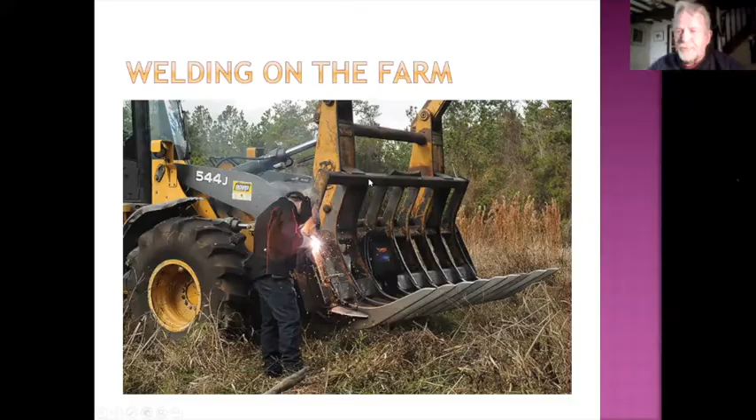In terms of welding on the farm, this is probably a typical scenario. And whilst there is a lot of information there, we'll come back to that image later on in the program. You may be aware that a lot of the fumes associated with welding are covered by certain operating criteria, exposure limits and time-weighted averages. But steel, and we're talking about carbon steel predominantly, hasn't fallen into that category.

However, after serious research done by OSHA and the Health and Safety Executive, they have found that there has been a link between the manganese in carbon steels and the effect that it can have. So this directive has now come out that basically, regardless of whatever process you're doing in welding, if you're undertaking those activities on any metals, including mild steel, then you need to take appropriate protection.

Now, there are different forms of protection available to you, and it's important to choose the most appropriate to suit the welding conditions. There's also evidence that's linked to kidney cancer and to some of the fumes that can come from some of the alloying elements that may be in the core of electrodes and in the wires, and also possibly from the parent materials.

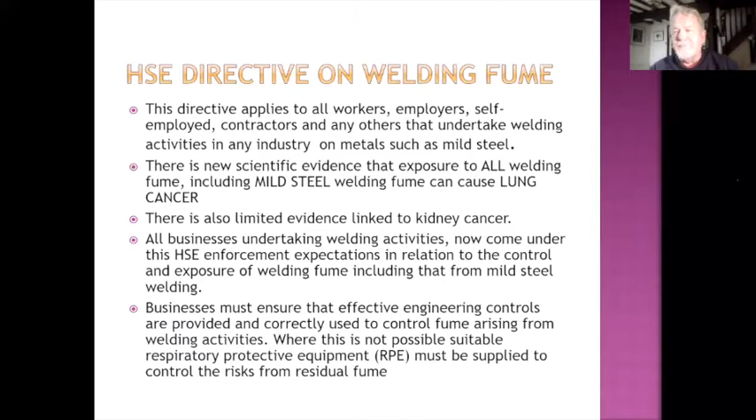Before we talk about fume, we have to recognize that what we see is a cloud, and in that cloud is gaseous content and very, very fine particulate matter. That particulate can be ingested into the body and lodge in various organs and have a cumulative effect over a number of years. And one of the things that welding has often been associated with is that it has an effect on the lungs.

Now, in the early days of welding, and we're talking now just after the Second World War, many welders were given a bottle of milk as a way of trying to control any fume that they may have ingested. Fortunately, we've moved away from that. We've recognized that within the compounds and the compositions of the filler wires and the shielding gases, etc., there is a potential. And we now look to the scientists who give feedback over a number of years of monitoring welders. The Americans have been doing this since the early 40s, and they've identified a number of issues.

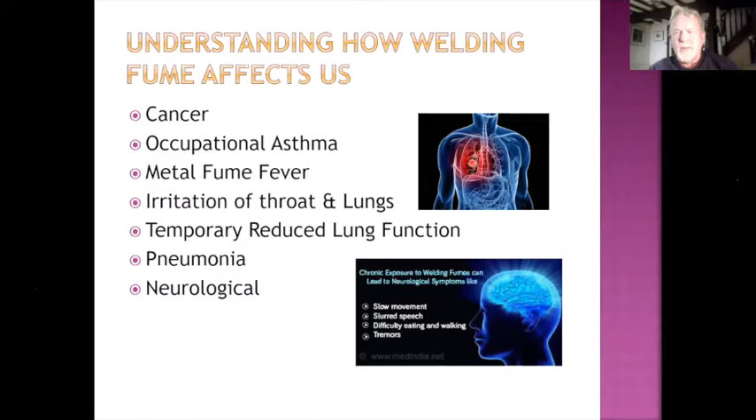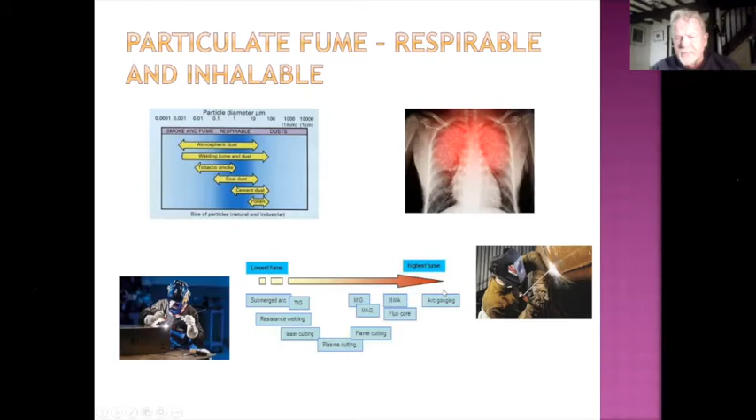On the left, bottom left, we've got someone doing TIG welding, which would be considered a relatively low fume process. And on the right-hand side, we have a manual metal arc weld going in, which could be considered to be on the highest fume level. And see, in the groups below, you can fall within those categories using whatever processes you're currently using.

When we look at consumables, we're predominantly talking about iron, chromium, nickel, manganese would be in there, could be titanium, there could be niobium, there could be molybdenum. Some of this will vaporize by the very nature of the arc you create and the amount of gap that you give between the end of your electrode and the workpiece. If you're operating at very high currents, higher than you need to, and perhaps using a CO2 gas instead of an argon CO2 gas, you can produce considerable spatter.

When we look at the gases, nitrous oxide, which you are possibly more familiar with as laughing gas, but it has an effect on the bodily functions. Ozone, which is given off naturally in the radiation of the arc, but also from welding aluminium. You'll get far more ozone when you work in that particular material. Carbon monoxide coming from the arc processes.

Cellulosic electrodes have certain ingredients in them to intensify the arc. And what that does is it also releases a considerably higher content of carbon monoxide. Also, the other thing that you need to be aware of is how you store your consumables. If they get damp, then they can fire and they can create more carbon monoxide whilst they're drying out, as it were.

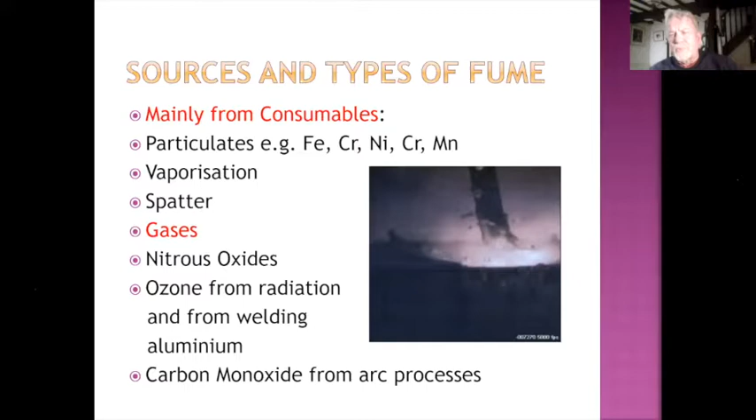Here we have an example of working stainless steel, hexavalent chromium content, where the issue is its potential as a carcinogenic substance. If we go with a conventional manual metal arc electrode, then there's an 87% percentage on that particular process. If we move to flux core wires, it reduces down to 50%. If we go to a solid wire MAG, we're down to 16%.

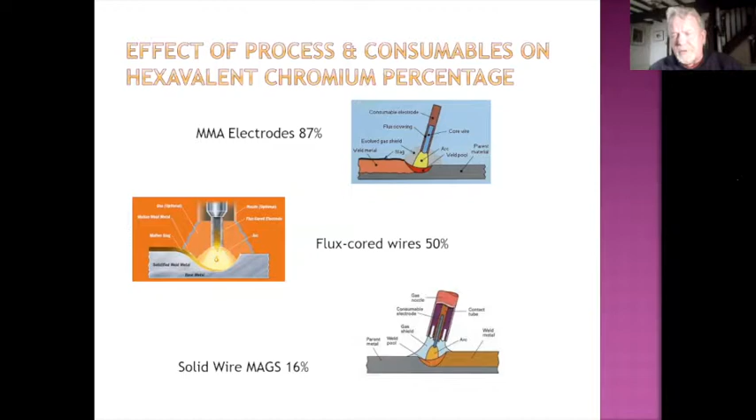So if we're looking at working on stainless steels and we're looking at, say, mass production, then obviously the solid wire MAG would be the better option to choose, speed-wise, etc. TIG is another option to look at there. Again, that would be within that range. But you can see that just by choosing the appropriate welding process, you can reduce the effect on welders having to work in that environment. So you need to be always looking at the most appropriate process to try and reduce.

Now, in effect, whilst you see this gas or cloud or shield, as it is termed, within that there are certain elements, nitrogen dioxide, collectively known as the nitrous gases. They are generated by the oxidation of nitrogen in the air from the effects of the arc or the flame. So oxyacetylene falls in this category as well.

Carbon monoxide could be generated by the flux welding processes. Also, of course, lots of shielding gases for the MIG/MAG process may have a carbon dioxide content, and also when they undergo reactions in the vicinity of the arc to form carbon monoxide. And it's the carbon monoxide that gives you the effects of feeling dizzy and lightheaded.

So for instance, if you were to perhaps carry out a repair, or perhaps you would want to replace a panel in the boot of a car. You've got your head in there. You're using an argon CO2 mixture.

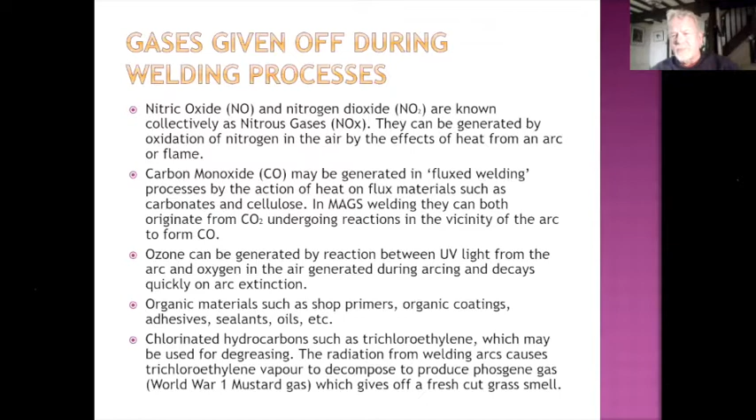Now, because of the range of materials, especially with regards to agriculture and across a whole range of industries, we come across a lot of coatings now on materials. They're there to prevent corrosion. They may be there for electrical conductivity. They may have a number of applications. So it's important to know the potential risks working with those materials.

All of the cadmium coated surfaces are resistant to mold and bacteria, so you can see that it lends itself to mass production. Many of you will have come across nuts and bolts and little brackets that have all got this almost rainbow effect. It's a sort of goldy color, and that is a cadmium coat. It provides resistance to corrosion.

It also forms a bit of a barrier when it's in contact with aluminium, so you don't get the decay that you might get with aluminium. It's a great lubricant, and it's got low electrical contact resistance. It has a high toxicity and can be fatal in high concentrations when welding.

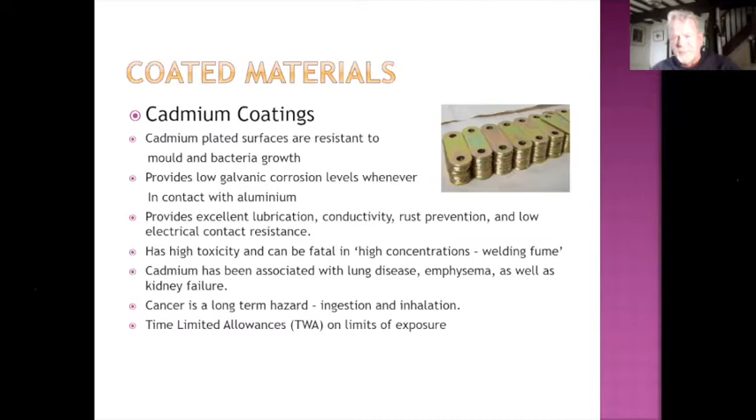Increasingly, aluminium is being used as a surface coating. It bonds well with the carbon steel, and it gives it excellent corrosion resistance, almost sacrificial. It has a low coefficient of thermal expansion, so it has an advantage over stainless steel.

When it is welded, some of the particles could actually produce white fume, which consists almost entirely of magnesium oxide and aluminium oxide, which are known to be lung irritants. The deposits are responsible for aluminosis, also known as aluminium lung, and bronchitis. These should be avoided as much as possible. However, a short-term exposure shouldn't adversely affect long-term health, unlike fumes produced when welding other materials.

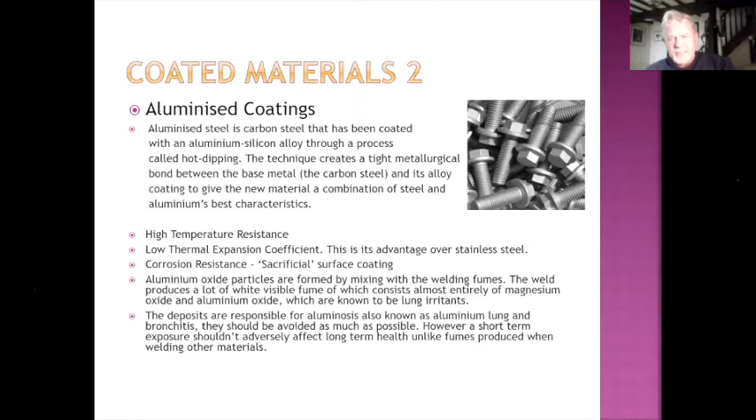Our old favorite, the one that's been around for a number of years, has massive applications all around. Virtually everything in the farm industry has got a galvanized coating on it somewhere. And it's here where people carry out repairs and they don't realize that that white cloud, that billowing that's coming off of the material, is actually zinc oxide fumes that they could inhale.

Metal fume fever. This is something that some welders will get at some stage: flu-like symptoms with nausea, headaches, high fever, shivers, and thirst. Sometimes you can even get the taste of metal in your mouth, on your lips. You can taste it. So you just need to be very, very wary.

Here, if you want to do some repair on that, I advocate the use of a brass or a bronze material, because it will alloy with the zinc. You won't need to take off the zinc coating. It will alloy with the zinc because the brass is a copper zinc alloy, and you will find that it will give you the flexibility and strength, especially in things like gates, etc., where there is a potential for fatigue. Preferable to weld out of doors, again using local extraction to prevent the fume buildup.

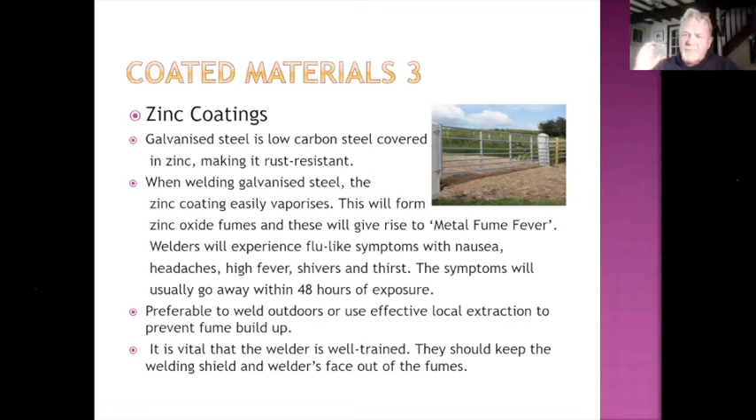Okay. Nickel coatings have increasingly come in, especially as we start looking at pressurized systems, pumping, and the agricultural and food industries. These coatings are excellent. Corrosion resistance is very high, and they don't impart anything. So increasingly they're being used. There are over 3,000 alloys of nickel which are used in industries and processes.

However, when inhaled as a vapor, nickel carbonyl can produce immediate or delayed lung damage, and it can also have an effect on the nervous system. So we're talking about a long-term exposure here. Inhaling air containing nickel or its compounds may cause occupational asthma. This is why I come back to my example with the stainless steel electrodes. You will smell that irritant straight away. So make sure in that instance you have, I would suggest, an air-fed mask when working those types of materials. Breathing in air containing certain nickel compounds over long periods raises concerns about cancer.

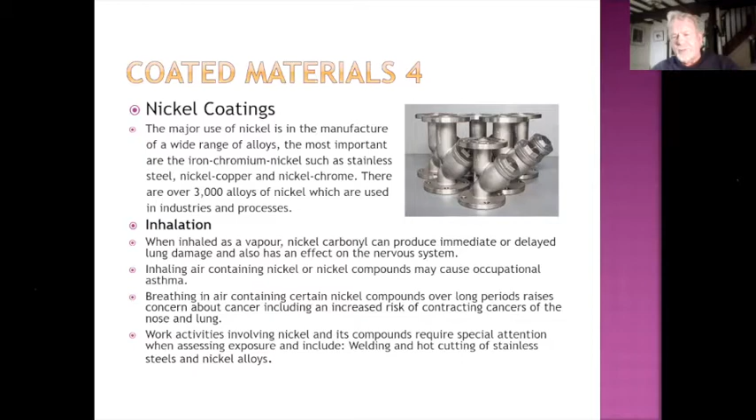Hexavalent chromium and nickel are within the category of the health and safety and COSHH guidelines, and they are being continuously monitored. So be aware of them. And finally, activities which require special attention when assessing exposure: welding and hot cutting of stainless steels. So if you use a powder cutting process on the stainless steels, again, there's a considerable amount of fume that comes off of that process, so be very wary.

Chromium coating, again, in many respects, this is one for the aesthetic look of the product, and also to give it excellent corrosion resistance. But again, we've got the hexavalent chromium, and with any hot work, there's a potential for that hexavalent chromium to be released. Therefore, it's recommended practice to ensure that you have good local extraction, ventilation, and respiratory equipment as well.

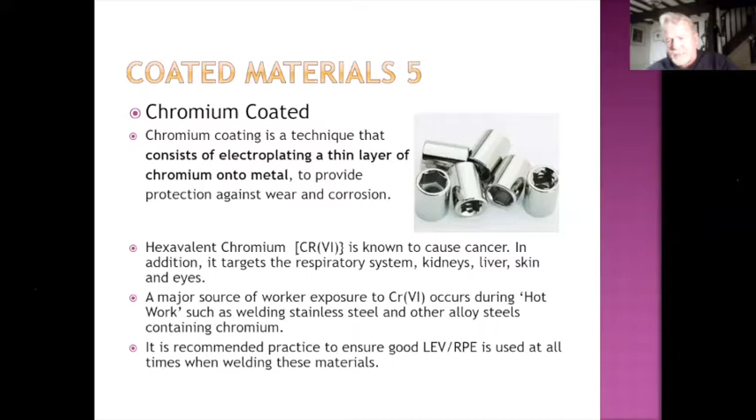I apologize for all of these coatings, but I think you need to be aware, because these materials are increasingly going across a range of industries, and at some stage you may well come across these. Manganese: quite often all new cars have a manganese coating on them so that they give the corrosion resistance, and they give an excellent key for the paint coat to go onto. So when you start looking at repairing a car, you're aware that the base coat on that steel may well have a manganese content within it.

Also, gears, power transmission systems, critical parts, nuts, bolts, etc., all have this manganese coating put on them. It's relatively cheap, very easy to adhere to the material, but it has the potential to cause this condition known as manganism long term. So again, grind off the area, carry out the repair, then you can get phosphate spray coatings back on, which will cover and bring back the corrosion resistance that you require.

Some of the symptoms of manganism and Parkinson's disease are similar. It causes tremors, shaking, loss of muscle control. And these conditions can become worse as time goes on. The Health and Safety Executive now recognises that manganese can also be carcinogenic, and therefore it now recommends that local exhaust ventilation and respiratory protection equipment be used at all times when welding carbon steels.

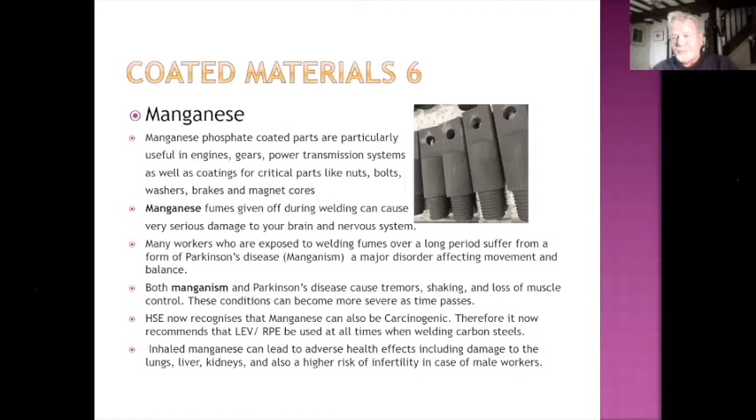And inhaled manganese over a long period can have adverse health effects, including damage to the lungs, kidneys, and there is a potential for a higher risk of infertility in the case of male workers, something that we're not necessarily looking for when we put a weld in.

Now, with any product and any machinery that we're working with, we need to be aware that there may be a residue on the equipment that we're going to carry out that repair on. And ammonia is one of the possibilities because of the range of muck spreading and other things that goes on. Again, a potential. We are more than aware of the fumes that can come from that, but also when you couple that with the other gases that could be coming off, there's a possibility that we could have an explosive reaction, or certainly some form of combustible activity.

Fertilizers, very high in nitrates. So again, we've got lots of situations here. Nitrogen introduced to a weld will produce a very hard surface, which will bring about the failure of the weld. And also it can have an explosive effect, as has been proved with some of the homemade bombs, etc., that have been made.

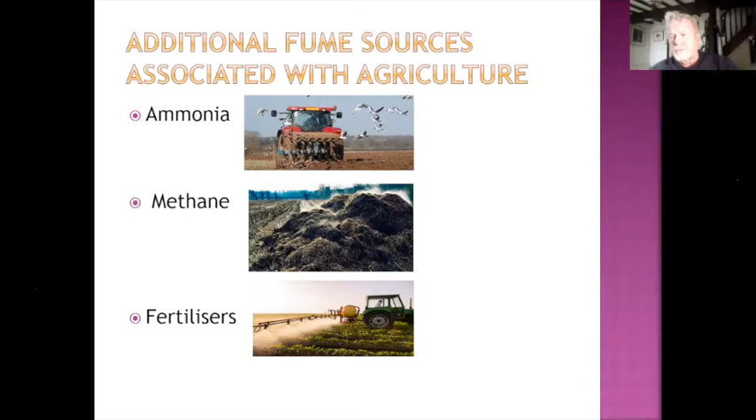So again, what we're looking for here is, wherever we're going at that repair, make sure it's scrupulously clean and possibly use a solvent to clean down that area prior to welding, so that we ensure that we've got a chemically clean surface that we're going to put the weld onto, and that we don't have any lingering alternative ingredients.

Now we come to the control measures, and perhaps one that has caused a lot of people a lot of anxiety. Risk assessments, when they first came out, were the bane of every working man, because we didn't really understand what it was about. Today, I would say a risk assessment has become a tool in the armory of everyone working with industry. One, it provides some guidance on and recognition of the operation that we're about to carry out.

It identifies the hazards. We put in place the measures to limit the effect of those. It leaves the opportunity to choose alternative joining processes, which might reduce the level considerably. And it also recognizes the fact that we have others in the area that could be affected by the effects of welding, whether that be visible light, fume, an explosion or whatever.

The risk assessment for the welder in many ways is their first line of insurance, because in effect, if the risk assessment is drawn up correctly, you have taken every single step possible to carry out an activity that is practically possible. In effect, you need to be able to operate that equipment within that level.

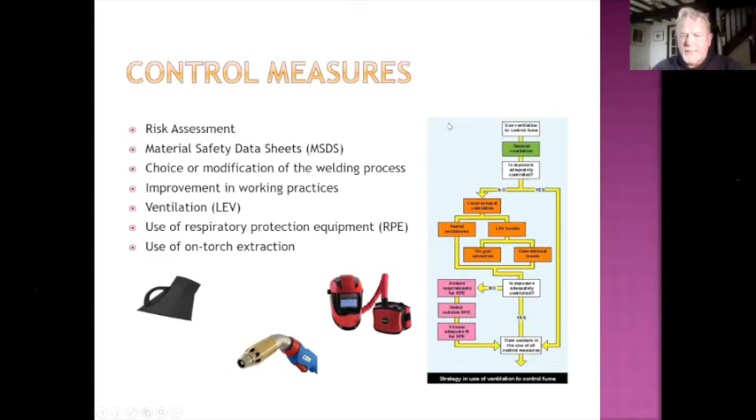And use of on-torch extraction. These have been in existence for quite some time with the MIG and MAG torches, but they are now also being developed for TIG welding as well. So again, it's a great initiative that's being taken. We're taking the fume at source and extracting it.

Here we have some examples of a mobile local extraction unit on the left-hand side. This would have a filter in it, and the idea is it will take the fume through the filter, arrest the particulate matter, clear the air, and release the surplus air. Great in terms of maneuverability, but you need to be aware that those filters need regularly changing, and some may be electrostatic, which means that they'll trap it and then there'll be a demagnetizing effect, and it'll drop into a collection box, and that'll be changed that way.

The respiratory mask, as we said, in a situation working in a confined space or low-access scenario, you've got that ability to work fairly close to it. And the on-gun extraction, you can see that there's very little fume emanating from that particular process. I'll just go back to the first picture. On the left-hand side, it's very important that you notice the position of the cowl of the extraction unit between the source of fume and the welder, not above him, but between him. So you're extracting it at source.

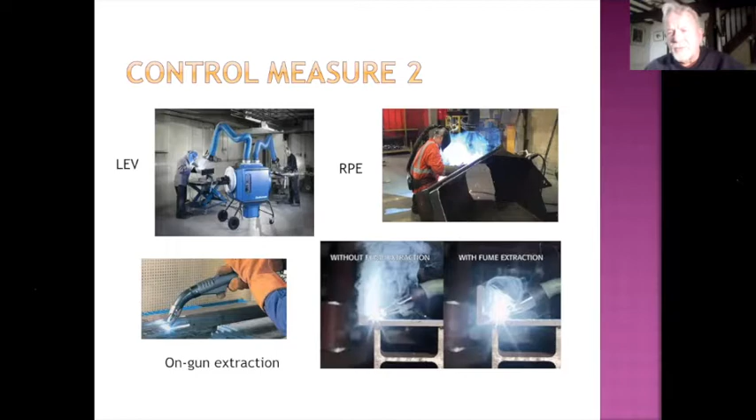And that is something that you need to be aware of if you're working out on site, because if there are high winds, they may well take away your shield, even if you're using manual metal arc, where when you strike the arc, you create your own shield. But the wind can take that away, and you can get atmospheric contamination of your weld deposit. So you may need to erect some temporary shielding around you, like a wind break or that type of scenario. So again, something to think about.

Sometimes you may not be able to get sufficient control with a local extraction alone. And if it's seen that the capture won't be able to get all of the fume, then any residual fume could be controlled by the use of these disposable masks.

And you're very much familiar with these, because these are quite often the ones that were recommended for the staff dealing with COVID. But again, they have a duration period with them. They have a maximum protection factor, and they also give a good range of protection. The one thing that they do require is a close fitting.

Now, if you happen to have a beard or something of that nature, or rough shaven, you need to ensure that you get a very tight fit around the area there, so that they are effective. You don't want any parts where it can seep through.

And you need to also ensure that you're shielding to protect other workers from any eye damage. It's quite a common thing that when you first learn to weld, you get used to shouting "eyes." So always give whoever may be in the area the signal that you're about to commence welding. Therefore, they have the opportunity to take the appropriate action. But you should have shielding there, and it should be some form of.

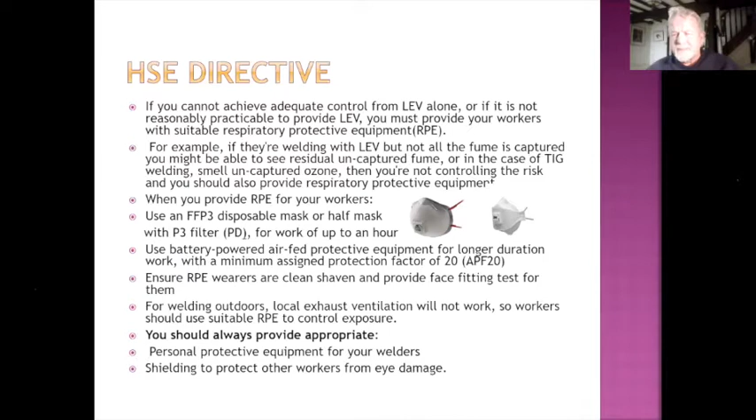They don't necessarily react to the periphery light that comes in the side, and it's that that can do the damage to some people's vision. So be very wary of carrying out any welding activities. Always assess the area before you go into it. I'm very aware that we're getting tight on time, so I'm going to move a little bit quicker.

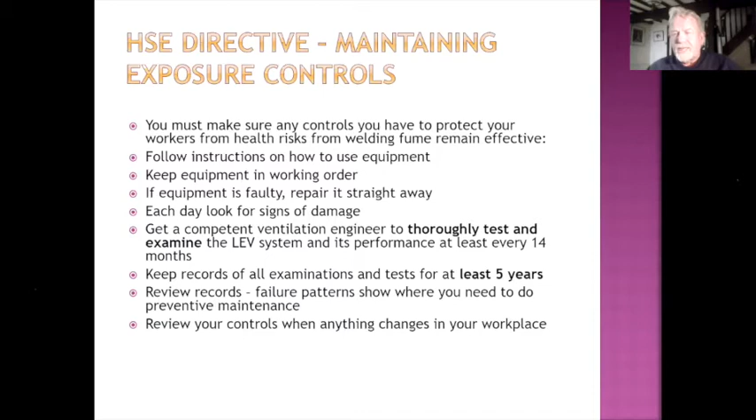Make sure that you keep all your records up to date, because with the Health and Safety Executive now, they could call in upon you at any stage, and always review the controls if anything was to change in the layout of the workshop or the functions that you carry out.

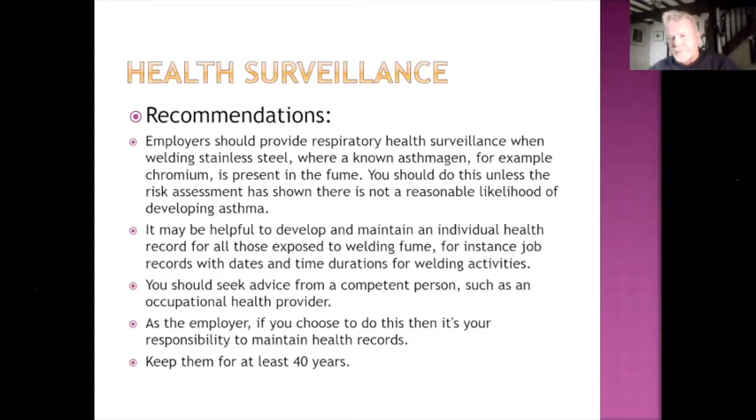And in the last bit, as an employer, if you choose to do this, then it's your responsibility to maintain health records. But what we're talking about basically is putting it onto a computer, put the statistics in there, and it's relatively easy to do. It's recommended to keep them for at least 40 years.

Electrical safety: it's always important when working outside to choose the equipment. I would always recommend the use of a DC plant, because you have a lower open circuit voltage.

When you strike an arc, the open circuit voltage on AC can be 1.4 times the mean voltage. So if it was 100, you could be up at 140 volts at a peak. Whereas if you're on DC, it's around about 40 to 60 volts. So there's a lower potential at all times.

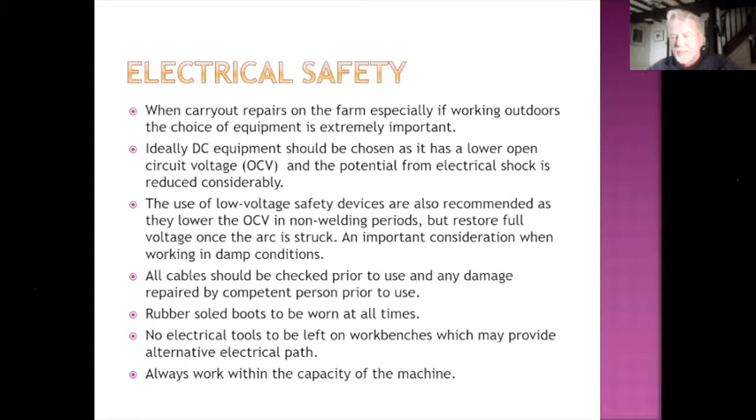Always check all the cables, all of the connections. Recommendation to wear rubber sole shoes at all times. Make sure you don't leave any electrical tools on the workbenches that you're going to strike up on, because you provide an alternative electrical path, and always work within the capacity of the machine.

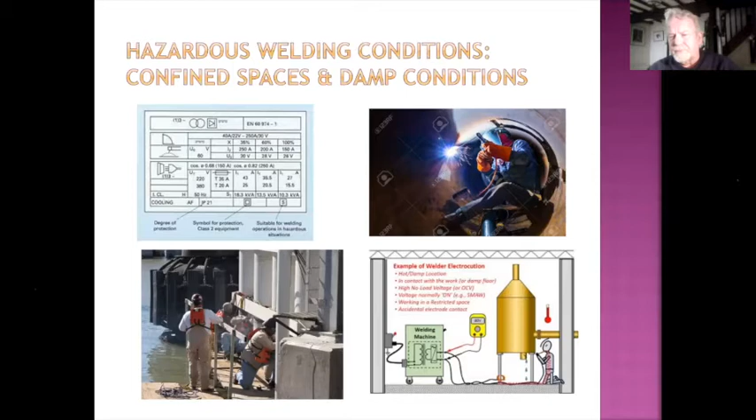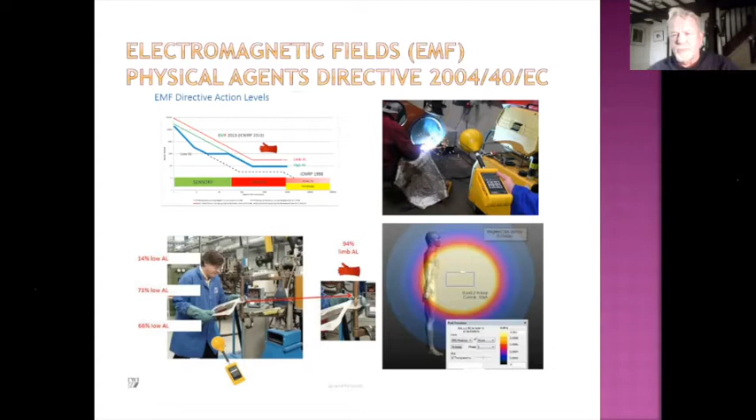Anyone who has one of the pacemakers fitted should never be around the electrical arc welding process, because it will change the rhythm of the device. Here's some examples of some welding issues that I thought we might reflect on.

And anyone carrying out that repair should be working to a weld procedure and a repair procedure for that type of work, because the consequences of something going wrong on that could bring about potential manslaughter charges long term. So we need to look at all the implications of carrying out these sort of repairs.

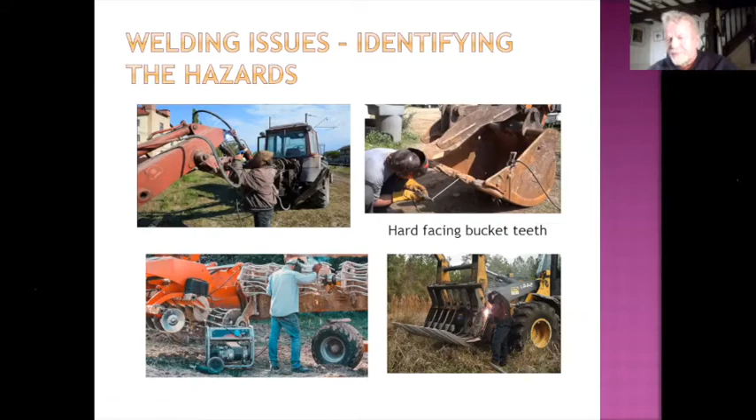In the instance on the bottom right, which was our original shot, you'll see that the gentleman is carrying out a weld with hot slag dropping down onto very tinder grass. He could find that he completes the weld and ends up completely surrounded by a field of fire. So that's an issue there. Also, you'll notice that there's another very substantial hose behind him, which could get some hot slag onto it and burn through. Again, there's a possibility there. There are pneumatics up there as well, and also it's a structural application.

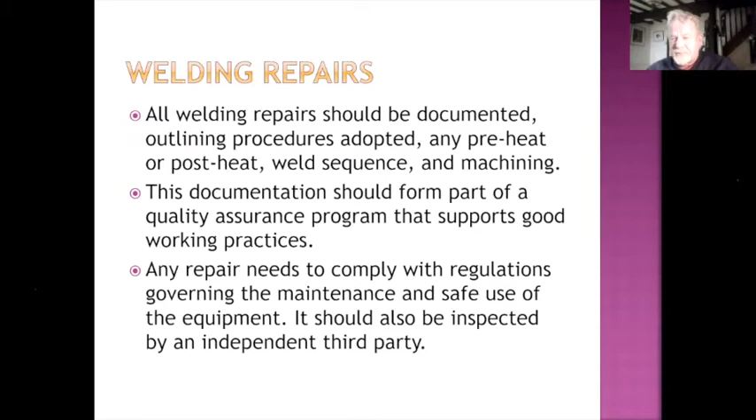As a regard, all welding repairs should be documented, outlining procedures adopted: if any preheat or post-heat has been used, the weld sequence, any machining. Documentation should form part of a quality assurance program that supports good working practice, and any repair needs to comply with the regulations governing the maintenance and the safe use of the equipment. And it is recommended that it should also be inspected by an independent third party.

Yes, thank you very much, Hugh. We've completed a very informative talk, and I'm sure that we've got some questions already in the chat there. Are people happy to unmute themselves and ask? If we go to the first one there, Richard Robinson, do you want to unmute yourself, Richard? Yeah. Sorry, I'm just remembering which question I asked. Can I start with my last one first?

Which was, when you're welding on equipment with batteries, what's your view about disconnecting batteries or alternators when you're welding? I would always disconnect because of the potential for a hydrogen build-up and an explosion. Also, I think it's important to remember that a lot of the agricultural equipment now has sophisticated electronic components and computers on board, and ideally the earthing strap should be disconnected to ensure that you don't send a current through that equipment. So you might have carried out an effective repair, but it's going to cost you best part of 10 grand to get the computer system back up and operating. So be very wary, and with cars as well.